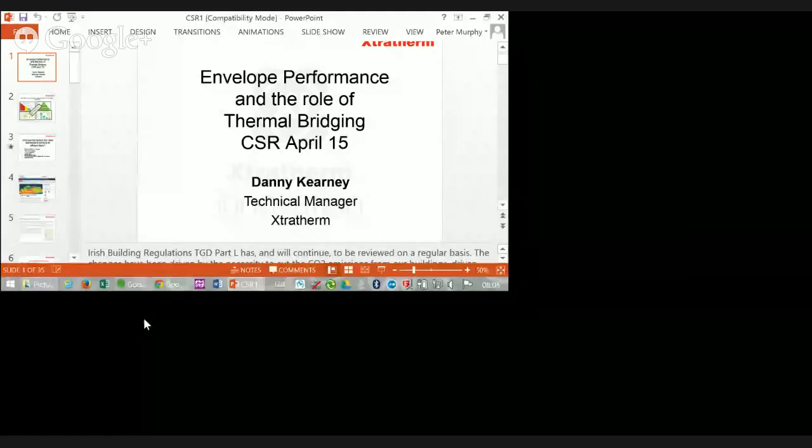Okay, we've just switched over. I've titled the presentation Envelope Performance and the role of thermal bridging within that.

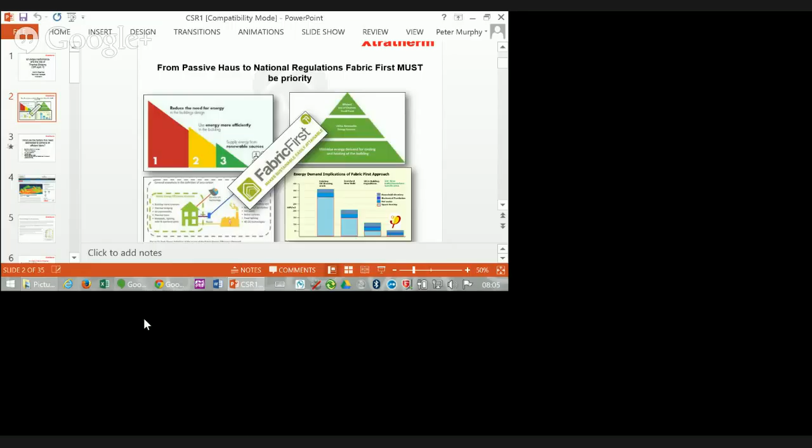We know that fabric performance, whether you're going for passive house or building regulations, is now seen as the most important factor for low energy or near zero carbon buildings. Building regulations in the UK, across European member states, and for organizations such as Passive House, are all about conservation of energy. No matter where your energy comes from, whether nuclear, oil, gas or renewables, once it's put into a building the most important thing is to use as little as possible. The way you do this is by improving fabric, or envelope, meaning how well the building is enveloped.

So what tweaks do we need to look at when building up the efficiency of a building fabric? We all know about U values or resistances, putting insulation in a wall, floor or roof to improve resistance to heat escaping. U values in Europe at passive house levels here in Ireland are down to 0.15. Air permeability is another principle people concentrate on, wanting to build airtight houses. And the poor sister of all of them is thermal bridging, which is why I want to spend time on it, because for insulation manufacturers it's one area, apart from U values, where we can give real benefit to energy performance.

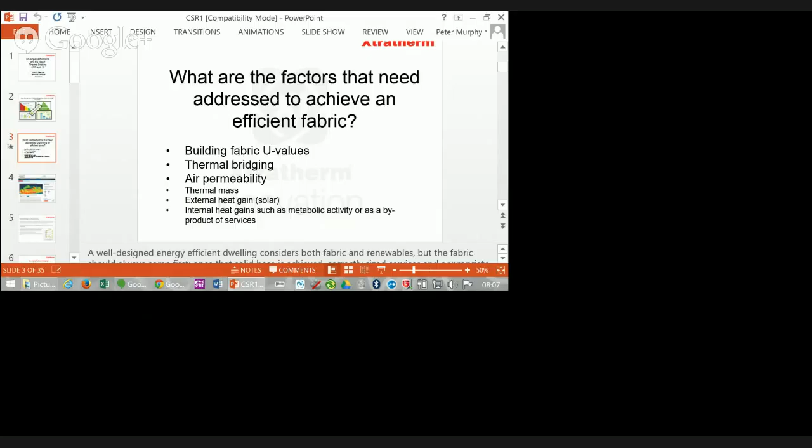There are other issues, such as the thermal mass of the building. I suppose that factor matters for certain parts of Australia dependent on mechanical cooling during the summer. Thermal mass could be an important issue—the heavier the thermal mass, the more it is able to regulate extremes of temperature. There's also external heat gain from solar and internal gains from building services such as ventilation systems, hot water tanks, and whatever.

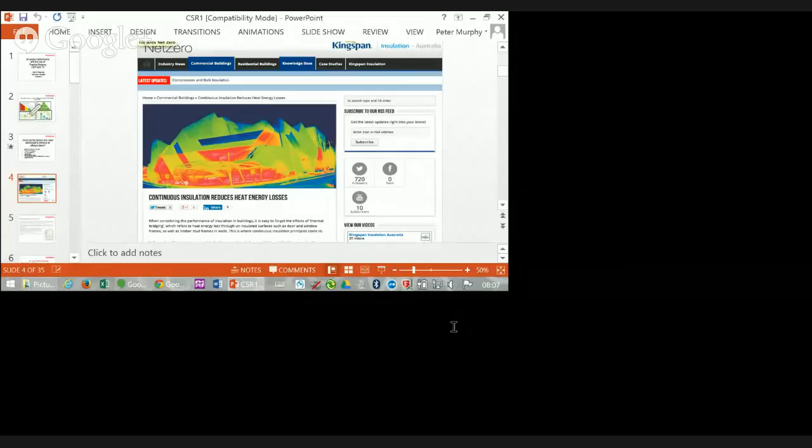But principally, U values, air tightness, and thermal bridging is what insulation companies are concentrating on or involved with. We know that in Australia, speaking to the guys recently, a number of our competitors have started to raise these issues. You can see here a piece made by Kingspan given to the press, and also Passive House in Australia are talking about thermal bridging quite a bit.

Passive House is a more extreme method of compliance, and I don't mean extreme in a bad way. Passive House is a German principle, a commercial organization that a lot of non-government organizations are striving to achieve, probably because national regulations are just not going fast enough.

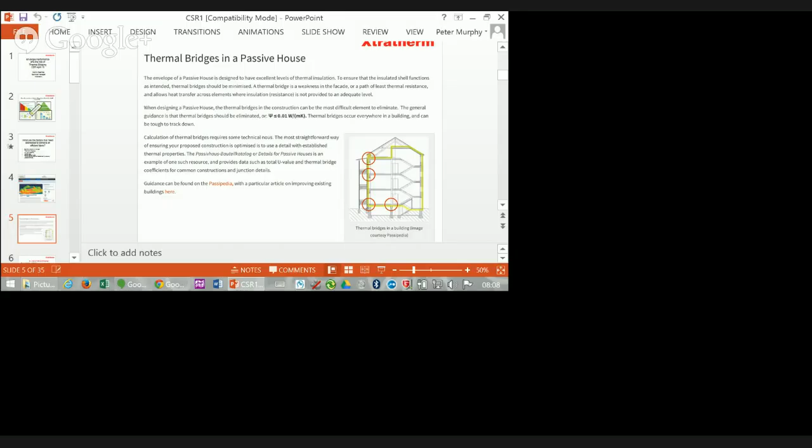U values similar to what we're now aiming for within Europe. Air tightness—part of the principle of Passive House is to go very, very airtight, to the extent that you need mechanical ventilation to get fresh air into buildings. National regulations typically don't go that far with air tightness, but the one thing they do concentrate on is thermal bridging, the non-repeating thermal bridging at junctions, and they put a specific value for every junction in the design.

So what is a thermal bridge? By definition, a bridge is basically a gap in the insulation continuity. The heat loss at a thermal bridge is greater than in the main element that you've insulated.

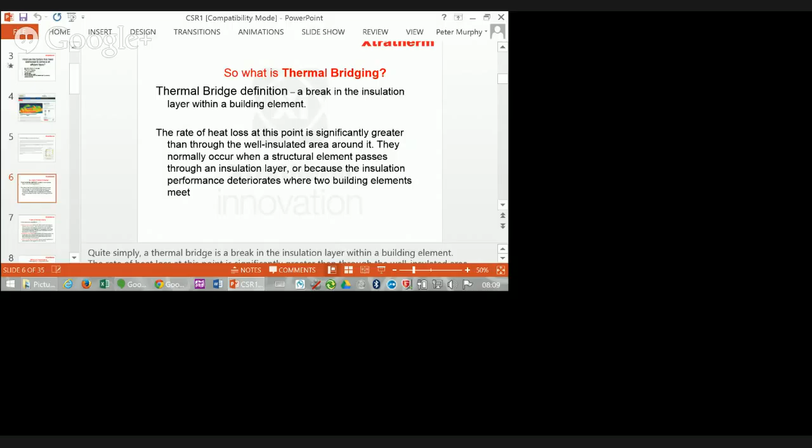So if you put your 4 or 6 inches of insulation into a wall or a floor, you're not experiencing great heat loss through that. But where you have a gap—whether by mistake, guys just leaving a hole in the insulation, or at a junction, say between a wall and a floor—that area is not as well insulated. First of all, they're a problem because you're getting heat loss, but those cold spots also lead to difficulties when it comes to condensation.

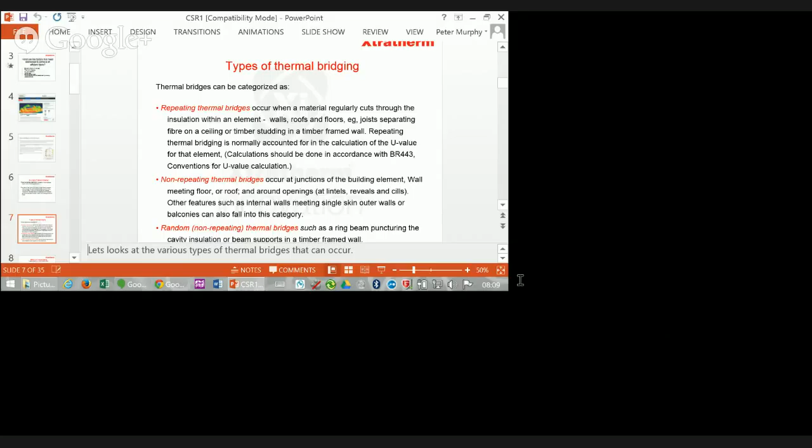I'll explain that later on. Your types of thermal bridging: repeating thermal bridges are the bridges you can foresee, the bridges you know are there. A couple of examples: if you're insulating a timber frame construction, you know the insulation is cut by a regular piece of timber in the form of studs or noggins. Same is the case if you're insulating between rafters on a roof.

The non-repeating thermal bridges, which we are concentrating on this morning, basically occur at all the junctions within a build. So as I was saying, you insulate a wall well, you insulate a floor well. Where that wall and floor meet, it is separated by 4 inches or 100 millimeters of concrete normally that splits through the floor insulation. That is a non-repeating thermal bridge, and it's quite significant because it's the full perimeter of the floor—and that's just one non-repeating thermal bridge.

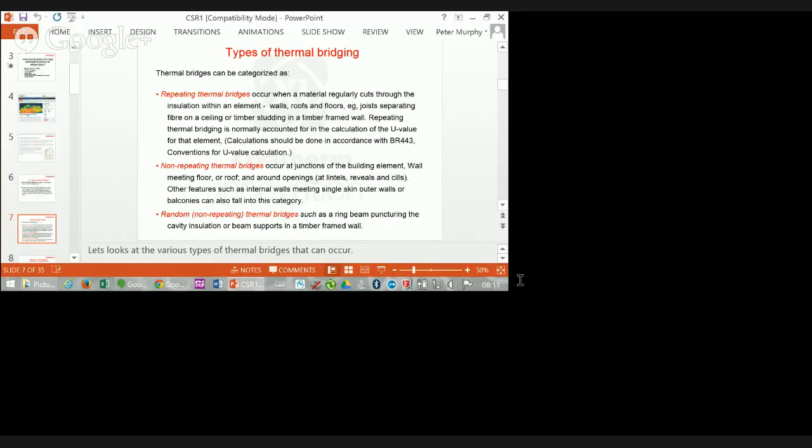Other areas would be corners, balconies, sills, gable junctions, etc. All these are now seen as significant areas of heat loss and must be measured under regulations and under Passive House. Random thermal bridges are exactly what it says—splits in the insulation that simply shouldn't occur. Meter boxes for gas or electrical metering that penetrate into the wall insulation would be a random bridge. They're not measured, but they should be insulated in some way, detailed properly by the architect.

So, repeating thermal bridges. There I'm showing a typical timber frame. In Ireland 10 years ago, we put fiberglass in between the timber studs to get down to U values of about 0.3, then progressed to get down to 0.27. We started putting solid PIR insulation between the studs.

Now, the principle we've taken in Europe is that we will work with the component insulation materials most suitable in any application. So we've actually got Agrément approval working along with fibre, because fibre is the natural material to put in between studs such as this—they're never accurate, and to cut solid boards is a slow and tedious job.

So you can see on the left here, the solid insulation between the studs only, and on the right hand side, the more traditional way of doing it: keep your studs a regular thickness of 89 or 100 millimeters, fill it full of fiberglass, and then cover the repeating thermal bridge with a layer of solid insulation to the outside of the construction or to the inside. I think the Australian climate lends itself to follow the construction I've just shown you, with a layer of solid board within the traditional cavity.

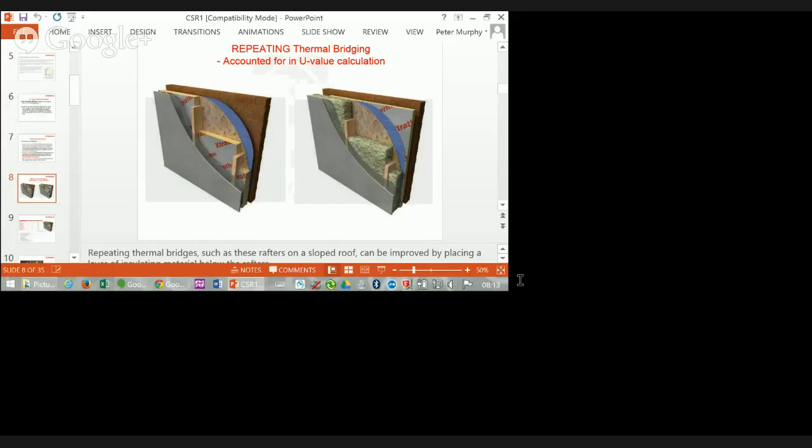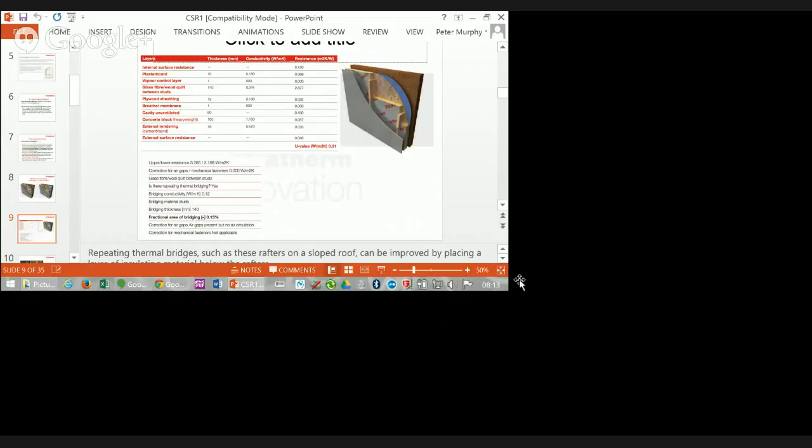By putting a thin layer of high performance insulation on the outside of the traditional stud, you get much better performance than just filling the studs full of good solid insulation, because that repeating bridge is there. If I show you the example of the U value calculation, I've put in PIR of 140 millimeter, fiberglass in between, and we can get down to U values of 0.31 with fibre in between. But if you go the second method and just put in a layer of 30 millimeter board on the outside of the fiberglass, you can bring that U value down to about 0.2. So a cheaper solution for the builder and a much more efficient one.

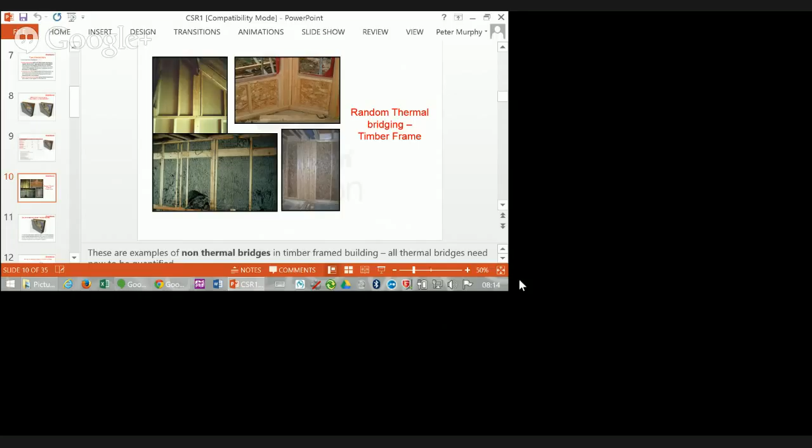Random thermal bridging in timber frame - here you can see basically stud infills instead of insulation infills. If you look bottom right, I don't know the reason, but I think it's holding up metal beams, but there's nothing between you and the outside temperatures other than that 140 millimeter of timber. By simply putting a layer of insulation over those studs, you get quite a big benefit when it comes to the U value.

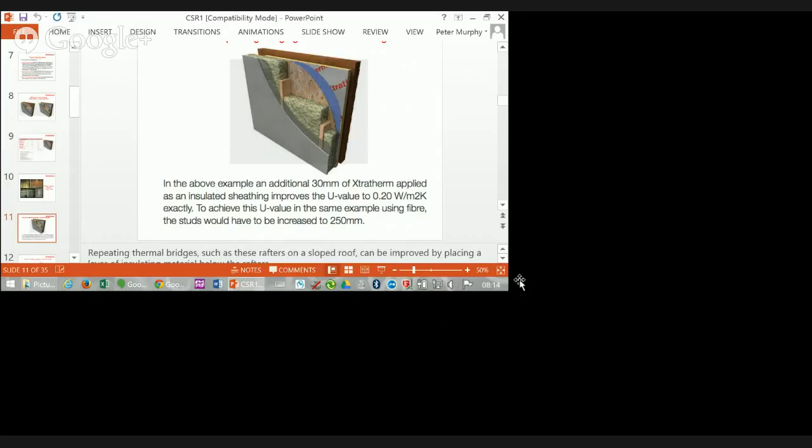There is the result of fiberglass with the layer of 30 millimeter insulation getting down to 0.20. The builders would tend to go for this option because the guys we are selling to aren't selling timber, they're selling space, they're selling houses. If we're able to give them U values like this by keeping their timbers at a regular size, using a material they like using, like the fiberglass, and minimizing the expensive high performance material, it gives them a very cost-effective way of meeting the building regulations.

Repeating thermal bridging as well, studs on a roof or rafters on a roof. You can get down to U values of 0.3 by just putting insulation in between, but regulations now state in this part of the world that you must underline all timber studs on a roof with a separate layer of insulation. When calculating the U values, the performance of the solid, unbroken insulation below is a lot more efficient than that in between, because putting insulation in between, it's broken every 400 or 600 millimeters by a big cold piece of timber. So you must work that proportion out when you're doing your U value calculations.

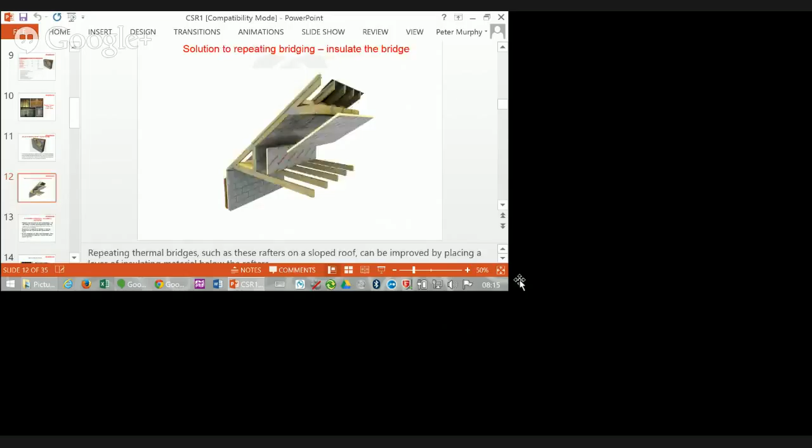All those repeating thermal bridges are accounted for when you do your U value calculation based on international standard 6946, a methodology developed in Europe that we all have to work to. So first you work out the insulation value through the insulation, another through the thermal bridge, the timber, and that is taken into account, and then you layer it with a single layer of insulation, and that is taken into account working your U value out. It makes a big difference.

Non-repeating thermal bridges are a very important issue now, because we're insulating our buildings to a very high performance at present. And the more insulation you put into a wall, a floor, or a roof, the more exposed it is leaving the gaps that are created at junctions, etc. We've worked out that in a well-insulated house to current building regulations in Europe, about 30% of all the heat loss experienced from a property will be through non-repeating thermal bridging.

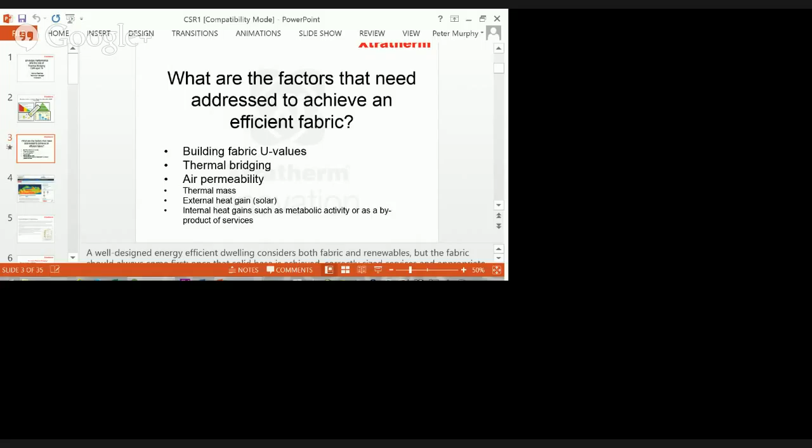If this thermal bridging is not detailed properly, you'll never get down to the low and zero carbon buildings we're striving for. More importantly, because you've insulated elsewhere so well in the build and left gaps in the construction, you're going to get problems with condensation being attracted to those cold spots. The theory being that the moisture within a building is happy enough to stay as a vapor until it moves across and hits that cold spot. The cold spot drops the temperature of the air, loses the ability to hold on to the moisture, so it dumps it in the form of condensation and mold.

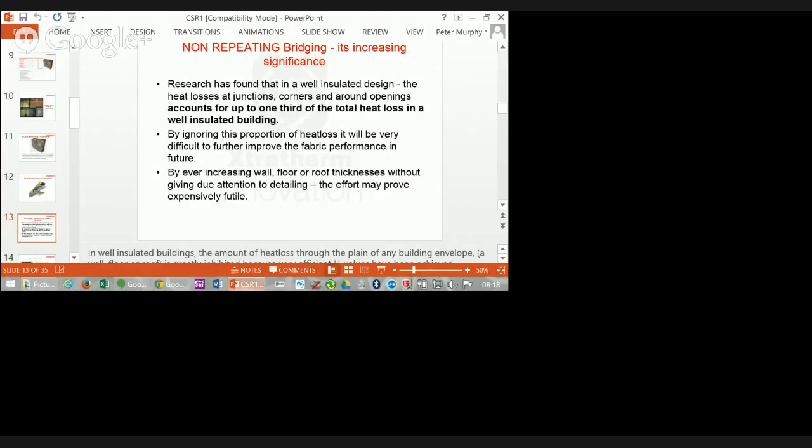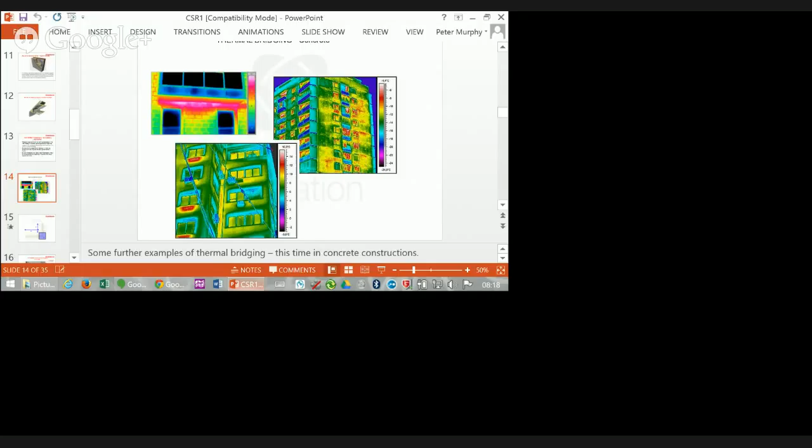As we tighten up the air tightness of our house, and put more insulation in, the prevalence of this mold is starting to manifest itself in reasonably new buildings, where people have strived for very good U values without improving the detailing. Some bad detailing in concrete build - you can see the heat loss through the concrete lintel there over the windows, also the sills underneath the windows. And in the large photograph to the right hand side, the thermography, you can see the floor junctions in particular, where the amount of heat loss is dramatically increased.

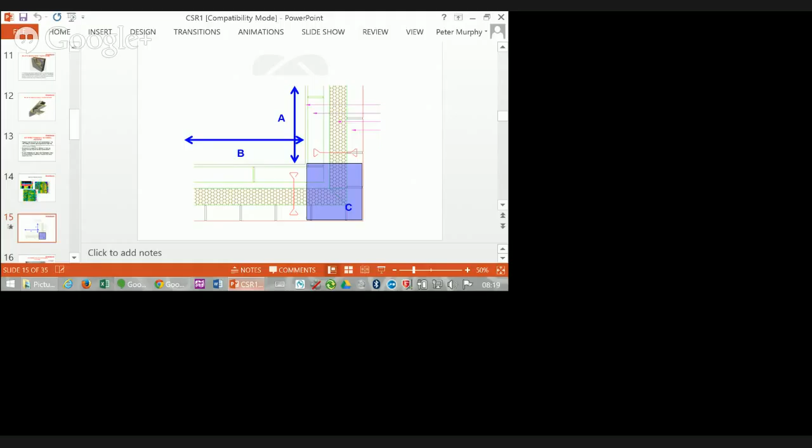So, where is the non-repeating thermal bridges? You can see in this diagram that you were busy doing U value calculations through the main body of the wall, but because we take internal measurements, the indicators here were A and B. We were working out the wall length and the floor perimeter, etc. The square C is basically ignored when it comes to the heat loss through that junction.

So these junctions must now be accounted for within the energy calculation that we use to get our energy labels.

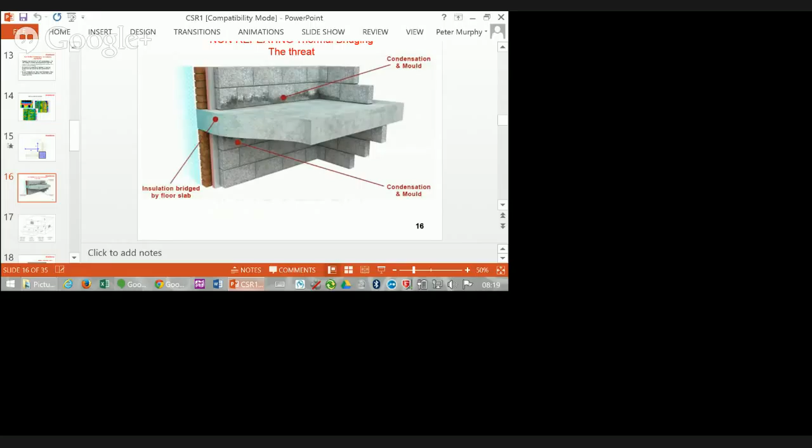This is an indication of an actual thermal bridge, and this is actually a real job we came across in Dublin about 5 years ago. I had a phone call from a guy on a site. He wouldn't tell me who he worked for, where the site was, but he told me that the apartments they were in had been built for a year and a half, and the oak floors they'd put in had started to go black around the edges.

What the guys had done is they had actually continued the floor slab through the cavity wall insulation, so that during cold weather the floor slab dropped in temperature, and the temperature dropped on the wall and on the ceiling inside the apartments. This attracted condensation, and the mold eventually manifested itself.

Now, 10 years ago, when I had only 30 or 40 millimeters of insulation in there, the temperature difference between the insulated wall and the bottom of the wall wasn't that great, so the threat wasn't there. But now we're putting in 60, 70, 80, even up to 150 millimeters of insulation in that wall, so the cold spots, in comparison, are really causing a big problem.

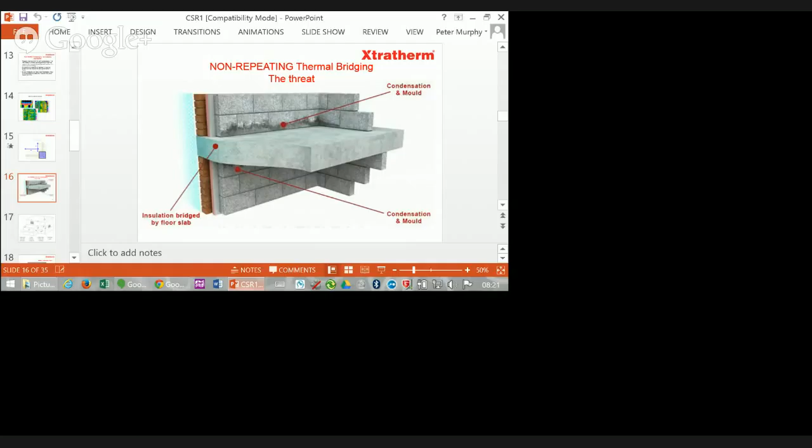The other thing was that in the old build, the guys would never have thought about airtightness, but now they're sealing them all up, thinking that energy efficiency is achieved by airtightness. By doing that and not changing the air through ventilation efficiently, you will not allow the damp moisture to escape from the building, and that's why the greater threat is there.

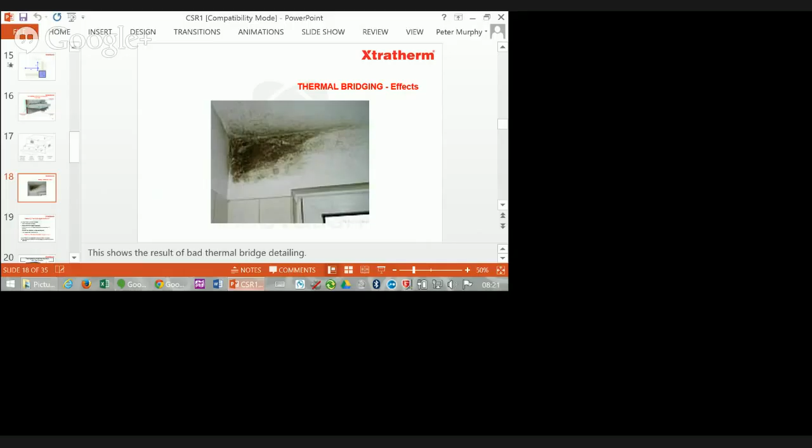That's what happens when you do not detail properly - you get mold growth in areas. If you think of old houses you've seen, you know where the mold is going to go. It's going to appear in the corners, at the floors and ceilings. It's going to be at the reveals of windows typically.

So measuring thermal bridging then, every individual non-repeating thermal bridge or junction will have what's called a psi value. Psi values are basically the heat loss through any junction. So all your junctions have increased heat loss at them. We have a minimum target to achieve, like a minimum U value, for each of the junctions now.

There's also a test when you're thermal modeling to work out the surface temperature at that junction. It's called the F factor, and that minimum surface temperature is set because if you drop below that temperature, that's when condensation forms. So it must be modeled to make sure that you do not hit that target, or to ensure that you hit a minimum target.

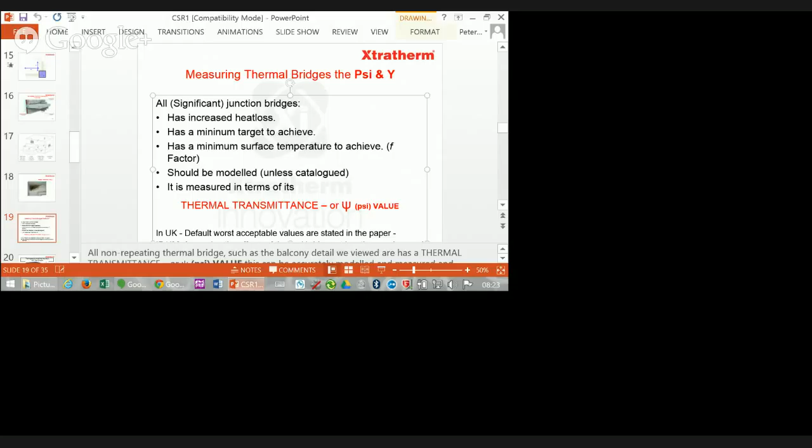So every junction needs to be modeled if it's not modeled by a third party. What we have in most European states now are catalogues of standard construction details that have typical values against them, and each of these measurements for each of the junctions is signified by the psi value. You can see the symbol here on screen. The paper where we get the guidance from in Europe is called BR 443.

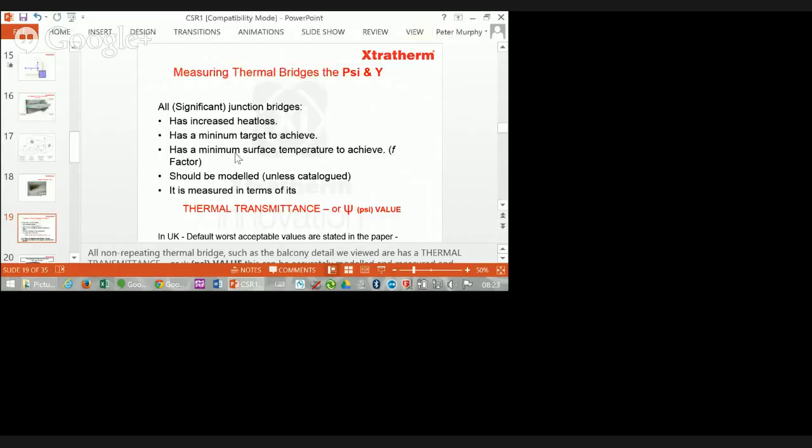A bit of a malfunction on my PowerPoint here. So, next slide - that is a model.

Well, a lot of people say they can model, but not very many people have actually been accredited by the authorities in the UK and Ireland to actually become thermal modelers. It is an extremely difficult scientific process to get involved with. A model like this at a wall floor junction would probably take about 3 days. So unless you're getting, in terms of euros, somewhere around 500 euros per detail, it would not pay you to do this commercially.

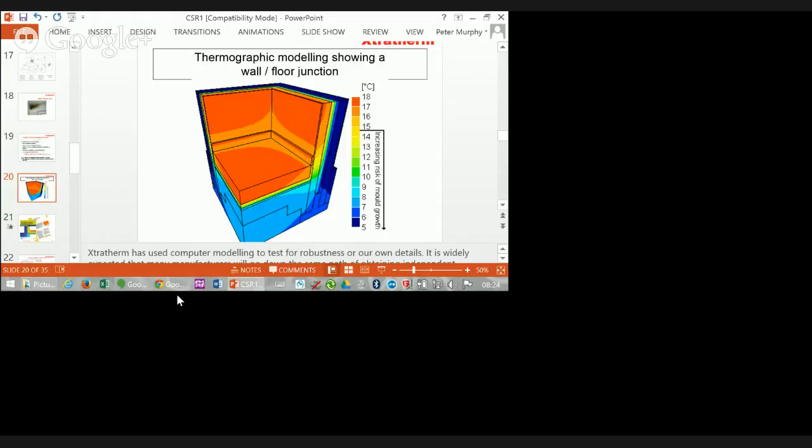Within Xtratherm, we had the first guy qualified in the UK and subsequently the first guy qualified in Ireland to do thermal bridge modeling, but it's not a service we actually offer because we can't see any way of making a few quid at it.

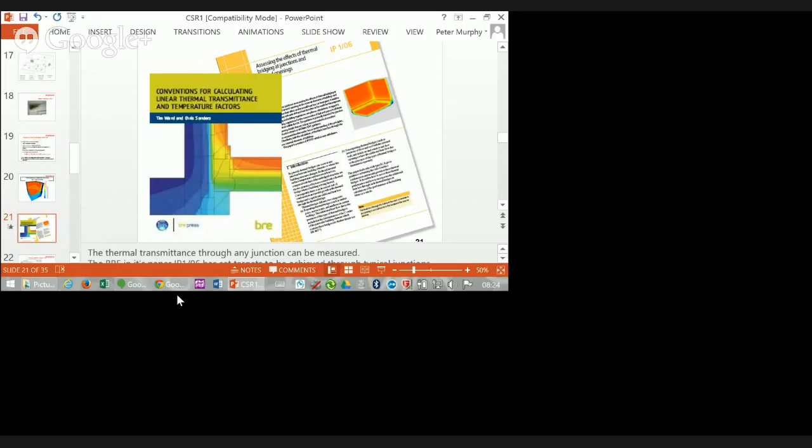Rules for modeling are based on the paper IP 1/06 written by Tim Ward of the BRE, and the conventions for calculations again by the BRE, written by Tim Ward and a guy called Chris Sanders, who's now at Caledonian University in Glasgow. There are separate default values for junctions in Ireland because we build slightly differently than in England.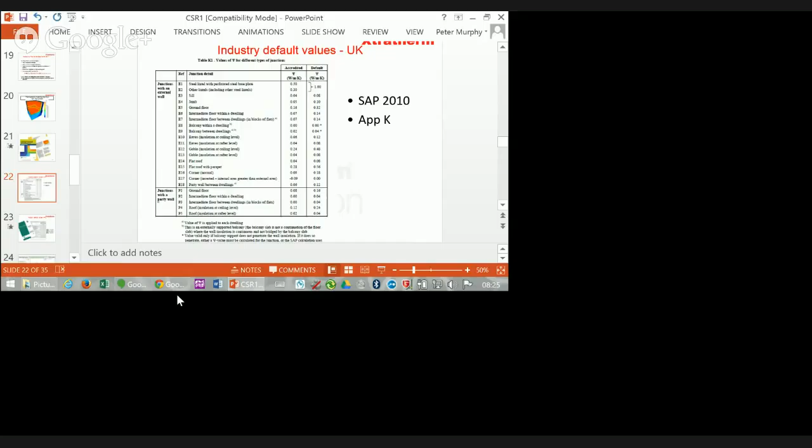English details here: you can see the third and fourth one down, a window jamb or a reveal will have a target for you to achieve of 0.05. If you cannot prove that, you must take the heat loss through that at 0.1 watts per meter K. So there's a significant advantage in actually going for the accredited value of 0.05.

In Ireland, we have the same details, quite comprehensive, covering cavity wall, external and internal insulation, timber frame, steel frame, and hollow block construction.

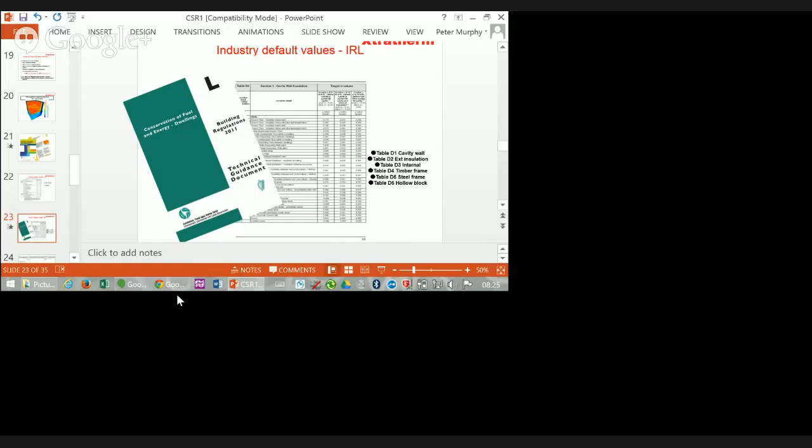What you guys should be looking for is whether there are actually standard details for construction in Australia. Does any government body actually publish standard details? Because if they are standard, that's what you should be looking at to improve with the insulation products you produce.

Now, how do you get, or how are you allowed to use the accredited value of 0.05? Well, what you do is follow the accredited details for construction that the government prints for free. And for each of these details, there's about 30 details for each build method I talked about.

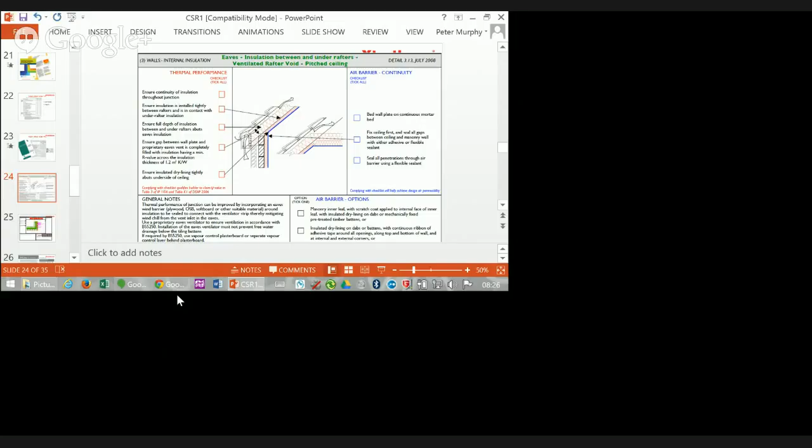It basically tells the guys what they should be doing on site. Double up your insulation, in this case on a ceiling, with a full layer of insulation to the underside to cover the repeating thermal bridges. At the non-repeating bridge at the wall plate, we ensure there is a thermal connection between roof and wall. That is basically it.

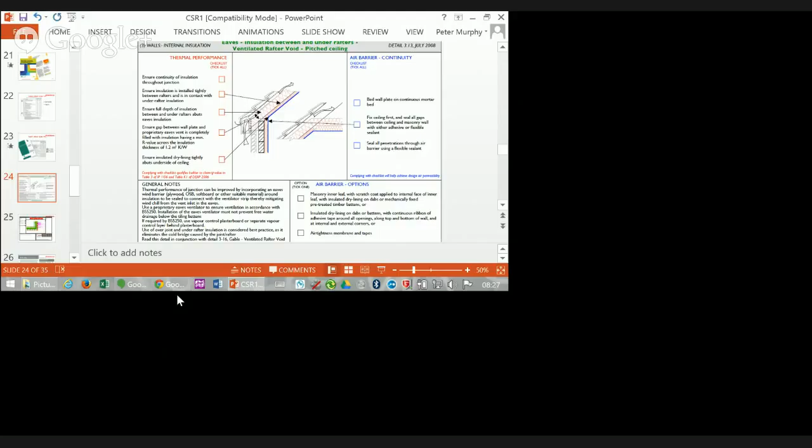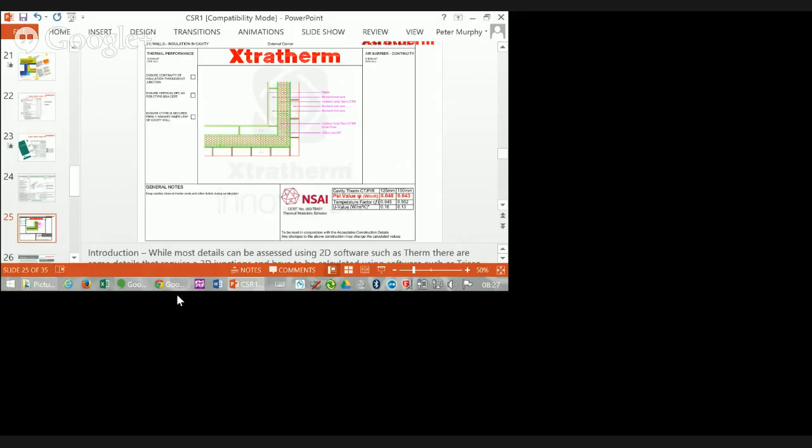What we've done at Xtratherm is taken those details a step further. We've taken the details, put our products in, modeled them again, and improved upon the default values. So anybody buying our products immediately gets an advantage on the values at their non-repeating thermal bridge.

And I have actually put this into our literature. This is a recently published guide to building regulations in Ireland to get down to zero carbon. You can see the same details we talked about earlier: the window jambs, the heads, the sills, the ground floor junction.

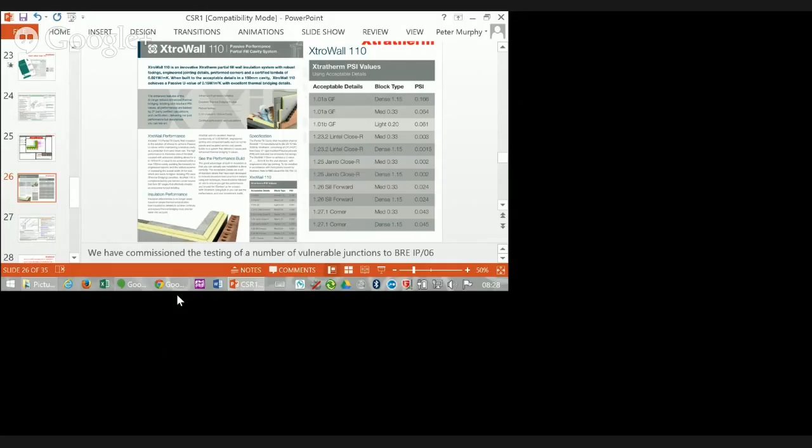We can go for block type: dense, medium, or light. You can see the values - let's take the window jamb, where the default value was 0.05. Go down to the middle of my box, item 1.25, using a medium density block, I can bring that score down to 0.002. So a significant improvement over the default values you must use with other insulation materials.

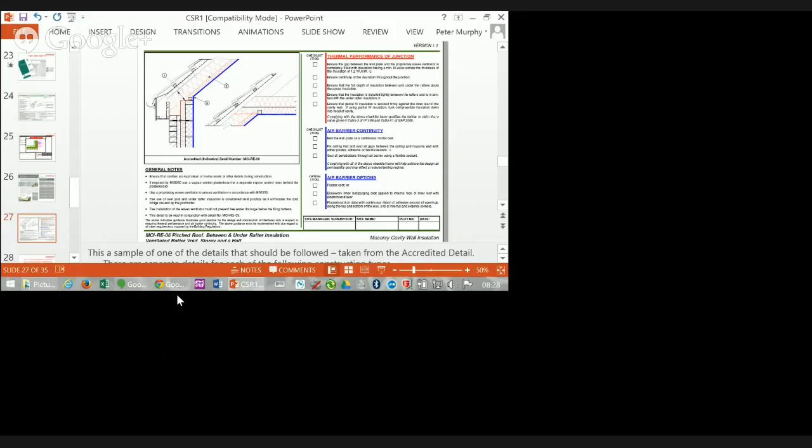So again, the standard details, we've just taken them, put our insulation in there, and had them modeled up. Now, the difference here is that we're talking so far about 0.005, 0.002, 0.05. We don't use those values in the calculation for low energy builds in national regulations.

The difference is the passive house. When you're talking to passive house in Australia, they do. They ask for every junction in their constructions to get past a psi value of 0.01. It is extremely onerous to get this done, to meet this target.

But what passive house does is measure them slightly differently. They take their measurements on a bridge from the external measurement. So again, the passive house guys will probably be pushing the regulation standards in Australia. They will be getting a voice among architects. But there is a significant difference when it comes to the national way of doing things and the passive house way of doing things.

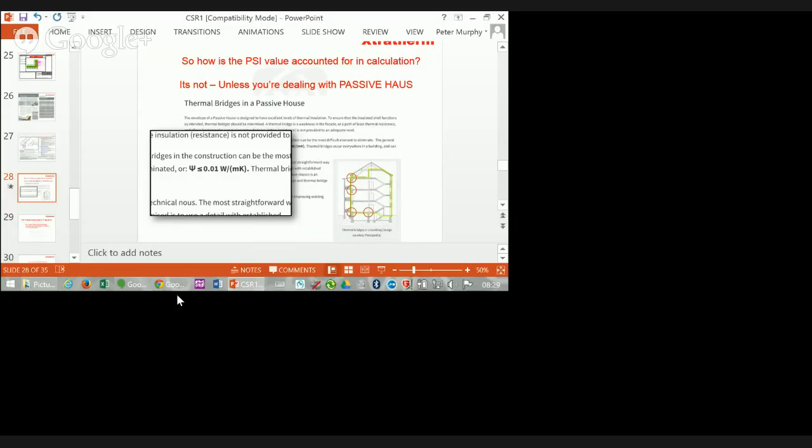If you take passive house results and measure them conventionally, they're not that different. I've got experience with passive house in Europe, and we work quite closely with them—they're just striving for a better build. There's just a bit of misunderstanding as to the performance when compared with national standards.

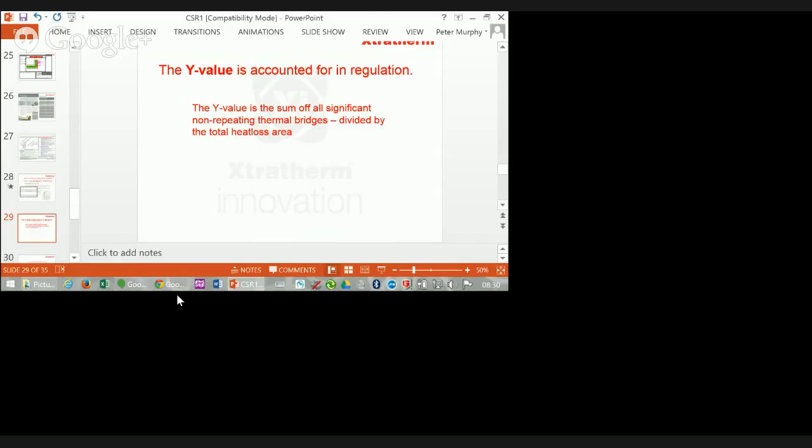What we account for, how we account for thermal bridging in national regulations, is the Y value—the sum of all the bridges in the house, so all the non-repeating thermal bridges. Your jambs, heads, sills are quantified by length, summed up, then divided by the total heat loss area—the area of heat loss through walls, floors, roof, windows, doors, etc. That's how you work out your Y value.

The way to look at a Y value is as a penalty—a penalty for having more heat loss at those junctions. If you were building to passive house standard and got 0.15 U value in the walls, floors, windows, your average would be 0.15. Now if you add your Y value for detailing on top, bad detailing in Ireland is 0.15, so your average U value for the building jumps to 0.3. It's like taking half of the insulation actually out of the construction—it's a massive, massive factor.

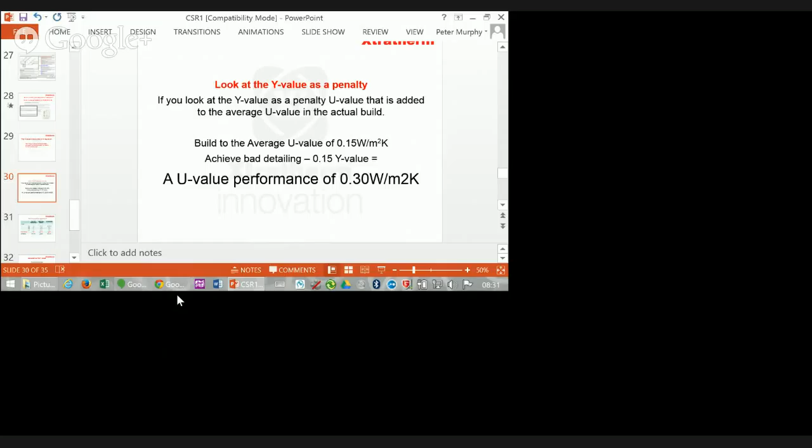Reducing the Y value from 0.15 to 0.08 still gives you 0.23—nowhere near what we need for zero carbon. We're getting down to values of about 0.3. In fact, the building regulations in Ireland here—you can see the left-hand column.

We've got indications of the U values needed for current building regulations, but we've also got the thermal bridging target of 0.05. UK zero carbon, to the right-hand side, is 0.05, and passive house is 0.01—but remember that's for every individual detail. A note of interest: the zero carbon standards for the UK.

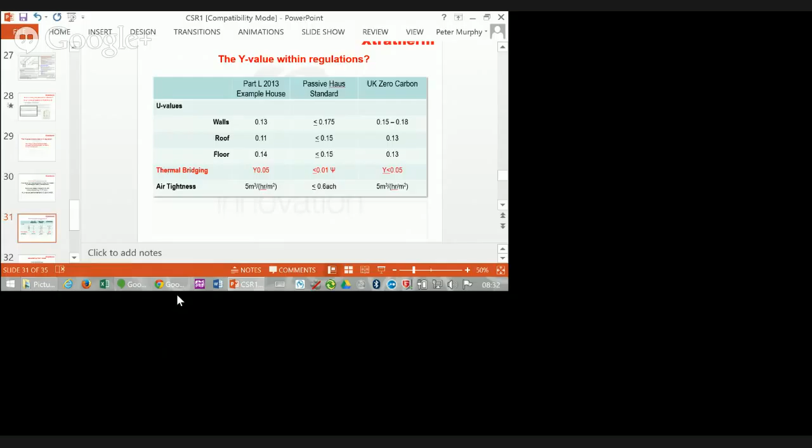They've kept their air tightness at 5. Air tightness at 5 will still work with natural ventilation. National regulations will not push you so airtight that you need mechanical ventilation—they've experienced too many problems with mechanical ventilation systems.

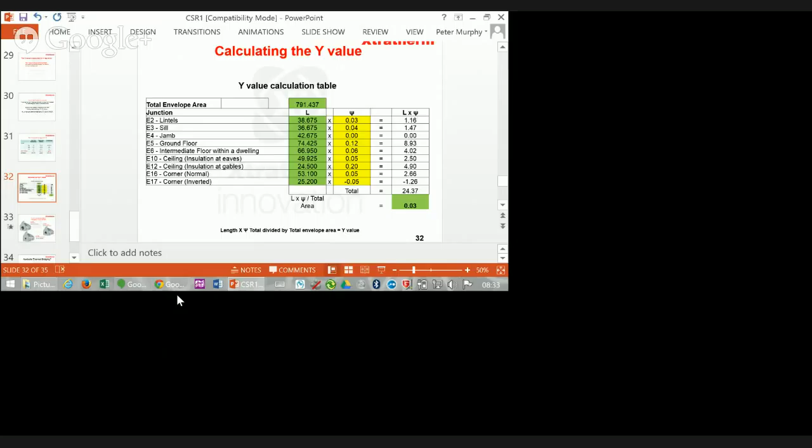So calculating the Y value here, I've taken a typical house. We've quantified your window jamb—the lineal meters is 42.675. By separating the jamb out totally, we're able to get down to a figure of 0 by splitting the wall totally. Your ground floor is 74 linear meters by 0.12. You multiply all your lengths by the junction psi value, sum them up—24.37. Divide by the total heat loss area of 791 square meters, and you get down to 0.03. 0.03, 0.04, 0.05 is very, very doable.

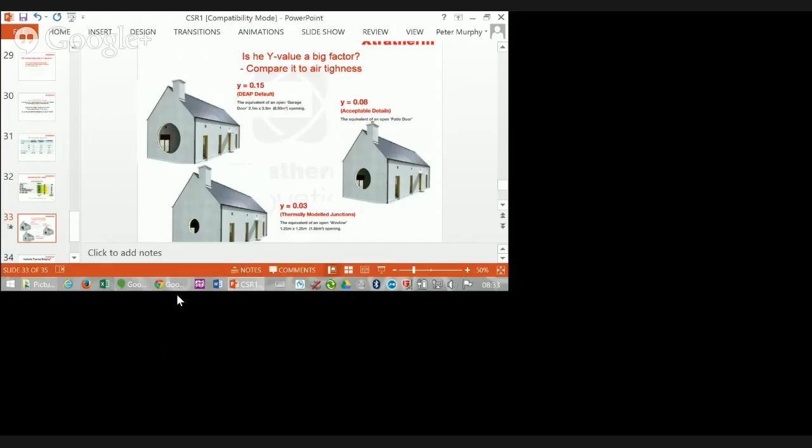So you can see people talk about air tightness, but thermal bridging is the major factor in achieving energy efficiency. There's not much we can do about air tightness, but there's a lot we can do as manufacturers to improve the detailing to achieve these Y values.

So what we talk about is best practice on site—joining the insulation properly, keeping the continuity going. We've used the technical knowledge we've gained to educate the specifiers, the energy assessors, and the builders on site about the importance of good detailing.

We can give them a definite commercial advantage when they're trying to meet very good energy levels in the house by basically providing better psi values that almost come free because they're using our materials. We've got them certified. When you put a piece of insulation in the wall with a piece of our insulation on the floor, you get that psi value for free. So quite an advantage there.

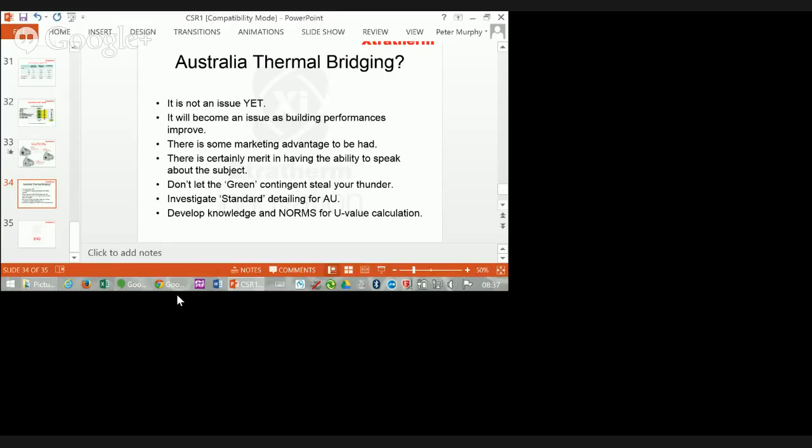And it tells you what the emissivity of foil should be taken at if it's not certified. It tells you the amount of dabs of plaster there is on the back of plasterboard when we're trying to work out the air resistance behind dot and dab plasterboard. So is there such an equivalent norm document for calculating U values out in Australia?

So quite a complicated subject, but we're here to help you build your reputation as the experts in the Australian field for thermal bridging and U value calculation.